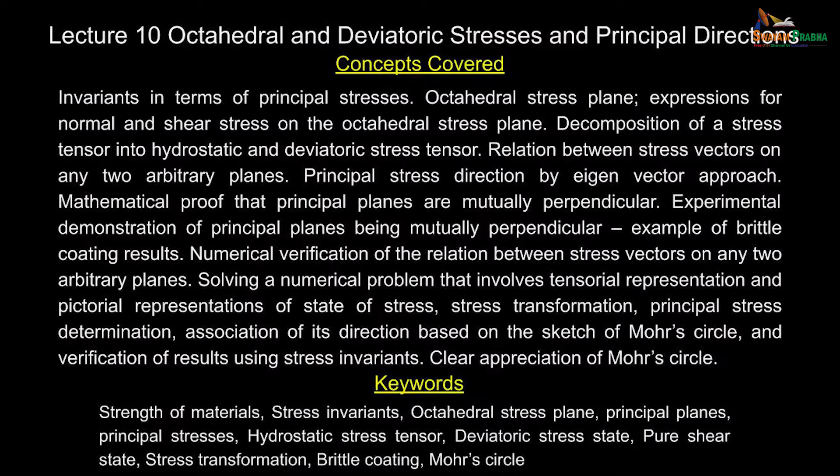We have been discussing principal stresses, and I said if you express the stress tensor at a given point in terms of principal stresses, there are certain advantages - your mathematics becomes a lot simpler. While developing the principal stresses, we have also looked at stress invariants. Stress invariants help us have inbuilt checks in our calculations. Other advantage is it can also be used to investigate whether the given stress tensor corresponds to a simple uniaxial stress or pure shear stress state.

We will also look at other aspects. When I look at the stress tensor in terms of principal stresses, I have put this in different color in order to distinguish them.

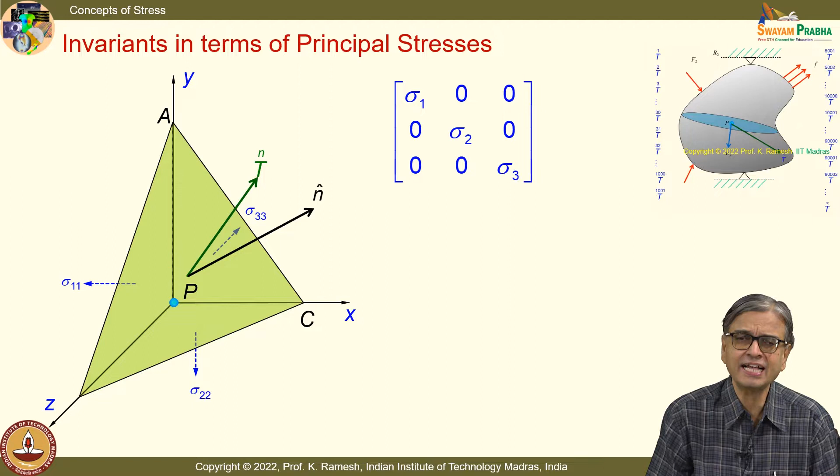You can also see that these are all normal stresses, and the invariants become very simple. Can you write the invariants I1, I2, I3 quickly? You know the definition of the invariants. I1 is straightforward, that is very simple. You should be able to write I2 as well as I3. When I express it in principal stresses, the computation is so simple and straightforward, hardly takes a minute.

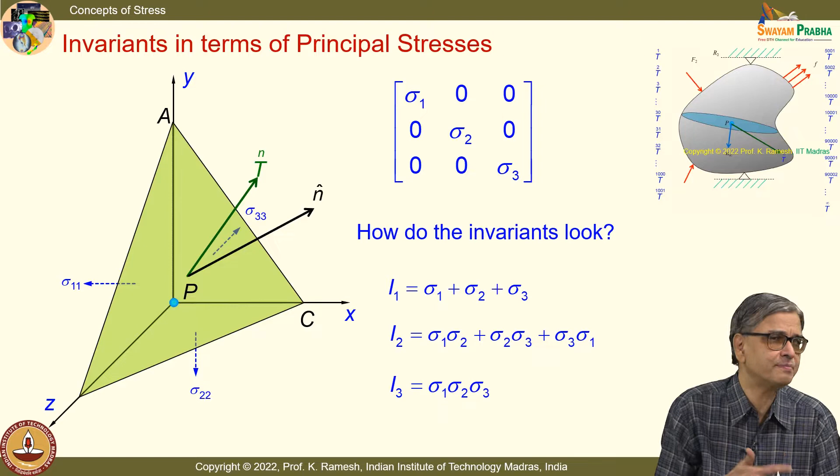So I have I1 as sigma 1 plus sigma 2 plus sigma 3, and I2 simply becomes sigma 1 sigma 2 plus sigma 2 sigma 3 plus sigma 3 sigma 1, and I3 is sigma 1 sigma 2 sigma 3. So simple and elegant. So there is good reason to visualize the stress at a point in terms of the principal stresses.

I also said many of the failure theories are essentially constructed around the principal stresses. So it has an advantage, and you can actually combine loading from various individual loads - from that individual stress tensor assemble and get the final stress tensor, from the final stress tensor get the principal stresses, and adopt one of the failure theories.

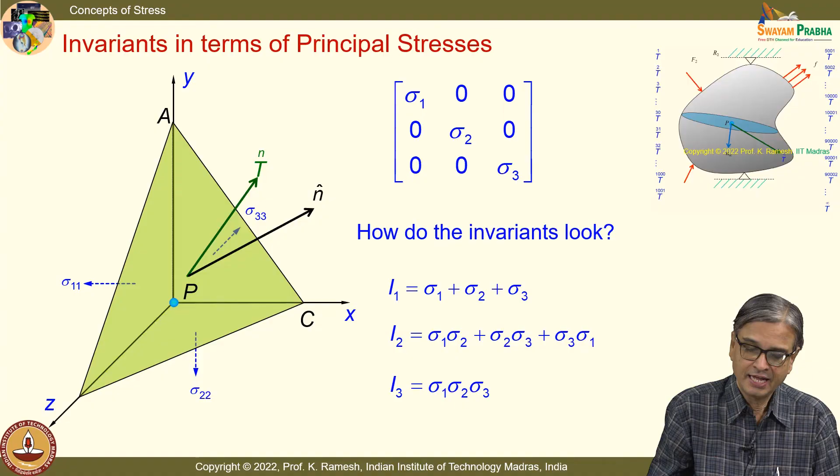People also have looked at newer planes. I said some planes are very important. We have looked at the principal stress plane, we have also looked at the maximum shear stress plane. From principal stresses, people also have looked at, when they were working on plasticity, what are known as octahedral stress planes.

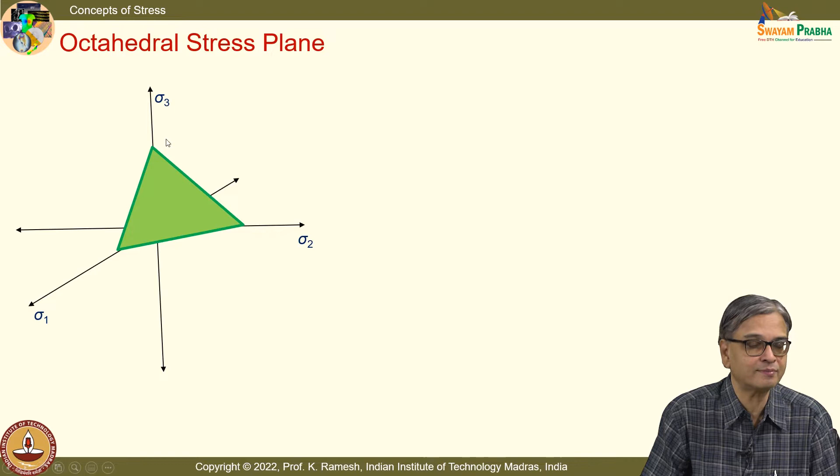What you have is, I have the reference axis as sigma 1, sigma 2, sigma 3, and this plane is equally inclined to the reference axis. We have already said certain planes are very important, and in that list you also include the octahedral stress plane.

Why is it called octa? I have this quadrant, I can have 4 such planes in the top half and 4 such in the bottom half. Then I will have 8 such planes identified.

Whenever you have an arbitrary plane, the stress vector can be resolved into a normal stress component as well as a shear stress component. We have looked at brittle materials failing by normal stress, and ductile materials being sensitive to shear stress. Once they have determined this kind of octahedral stress, they have also looked at what happens to octahedral shear stress.

I said multiple failure theories have been created. So when you understand the state of stress at a point, whichever aspect - if it is a normal stress, look at what happens when the normal stress reaches a critical value. If it is a shear stress, look at what happens when it reaches a critical value. On the similar line, people also have developed theories where what happens when octahedral shear stress reaches a critical value.

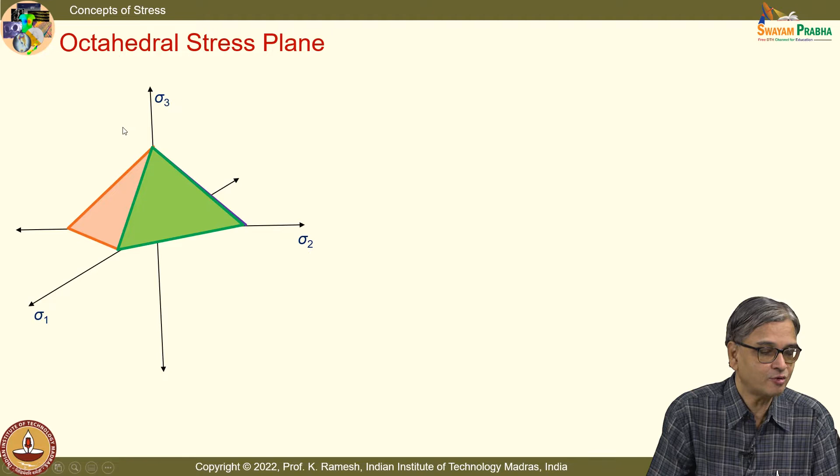So the term octahedral - you can understand, I can have 4 such planes in the top half and 4 such planes in the bottom half, and they are also nicely colored to give you some enthusiasm in learning this course.

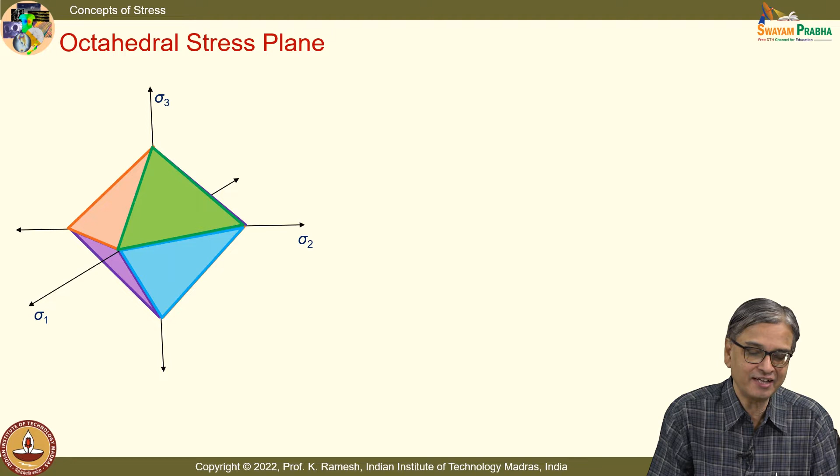Do not think that these planes are colored - these are normal planes, colored for you to keep your attention. The development of this goes to Arpad Nadai. He lived very recently.

The plasticity theory really developed in the early part of the 20th century. People thought, when they were looking at it, that they need to have this octahedral shear stress also. Now you can find out, because you have sigma 1, sigma 2, sigma 3.

In the last class I said, when I have a plane, it is now defined as an equally inclined plane. You can find out mathematically what is the expression for the normal stress and what is the expression for the shear stress. Can you work it out and then check it with me? Because you were supposed to do a homework yesterday, I am not sure whether all of you have done it, because the ground rule is you give the homework, it is never done.

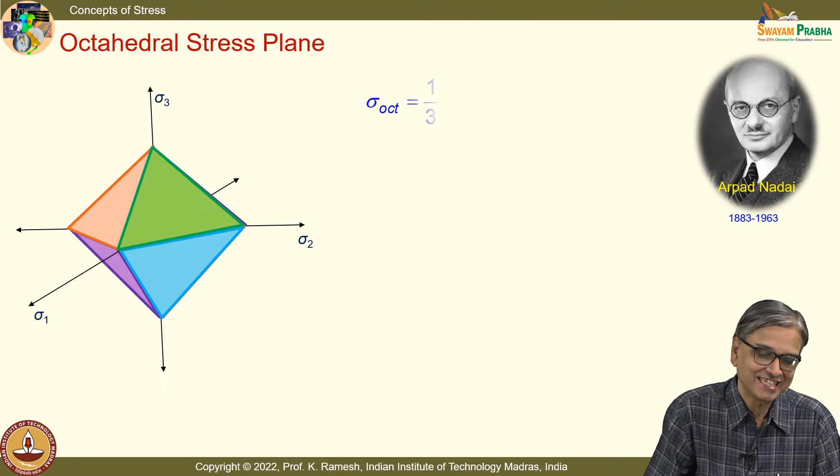So, the octahedral normal stress is very simple to write, that is 1/3 of sigma 1 plus sigma 2 plus sigma 3. In terms of invariants, I get this as 1/3 I1.

You can also write the octahedral shear stress, and you will find that it can also be expressed in terms of the invariants. The tau octahedral is given as 1/3 of sigma 1 minus sigma 2 whole square plus sigma 2 minus sigma 3 whole square plus sigma 3 minus sigma 1 whole square, the entire expression under square root.

And you know the invariants. I have I1 as sigma 1 plus sigma 2 plus sigma 3, I2 as sigma 1 sigma 2, sigma 2 sigma 3 plus sigma 3 sigma 1.

This expression can be rewritten in terms of the invariants. It is not very clear at the outlook, but you can substitute I1 and I2, simplify, and make sure this matches. So I get tau octahedral shear stress as square root of 2 by 3 multiplied by I1 squared minus 3 I2, this expression under square root.

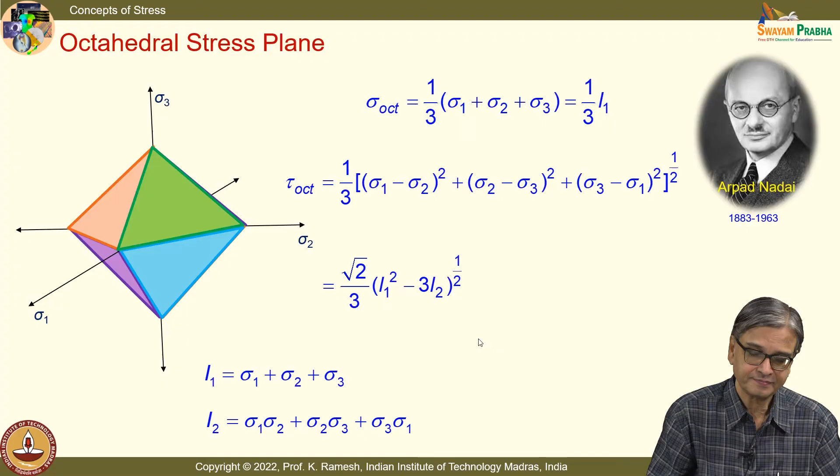People also thought, as I have been saying, we are happily living in linear elasticity. So I can superimpose stress tensor, and any given stress can be uniquely resolved into an isotropic state and a deviatoric stress state. So we will have to look at the stress tensor, the way I decompose it, and figure out what is the meaning of deviatoric.

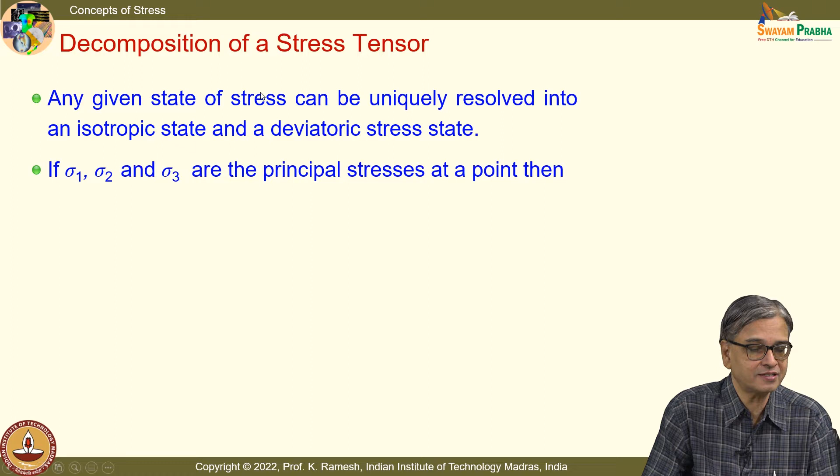So I have the stress tensor expressed in terms of the principal stresses sigma 1, sigma 2, sigma 3. You write the stress tensor in this fashion, with sigma 1, sigma 2, sigma 3 in the diagonal term, and this is written as a superposition of an isotropic state. That means I have a constant value P, identical on all three directions.

That's what happens when you immerse anything inside a fluid bath. Suppose I put it below 100 meters in a liquid, you find it is a hydrostatic compression. Now we have to choose what is P. What is the way you select P? That matters.

And P is taken as 1/3 of sigma 1 plus sigma 2 plus sigma 3.

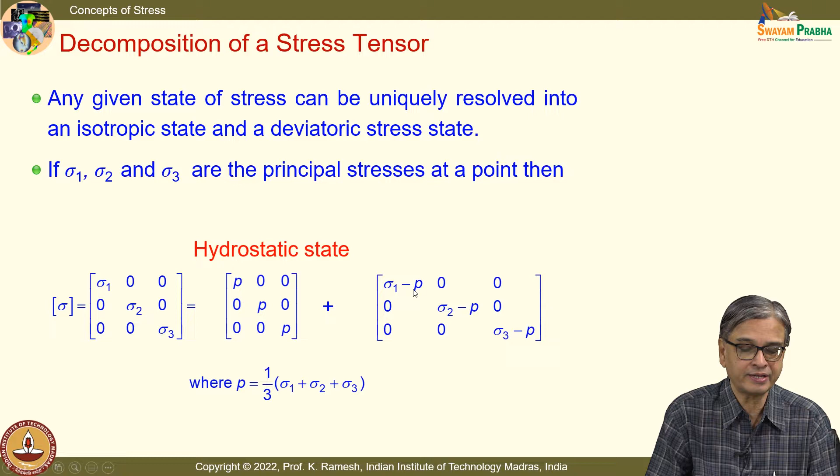So can you fill what should be the stress tensor that adds up to sigma 1, sigma 2, sigma 3? You can easily do that, because I have separated out a part where the stress magnitudes are P, and we understand this is a hydrostatic state. If the addition must equal sigma 1, sigma 2, sigma 3 on the diagonal, the remaining stress tensor is simply sigma 1 minus P, sigma 2 minus P, and sigma 3 minus P.

Can you comment, from whatever you have learned so far, what this represents? Anybody can make an intelligent appreciation of what this stress tensor is? This is definitely called a deviatoric stress state. I have not deliberately given the other name. I want you to find out and tell me, from what we have learned so far.

I can give you a clue: use the invariant, we have looked at invariants, they have some advantage. It is learnt very recently. This stress tensor represents what kind of stress state? That means you are sleeping, you are not exercising your mind. You have learnt it just in the previous class.

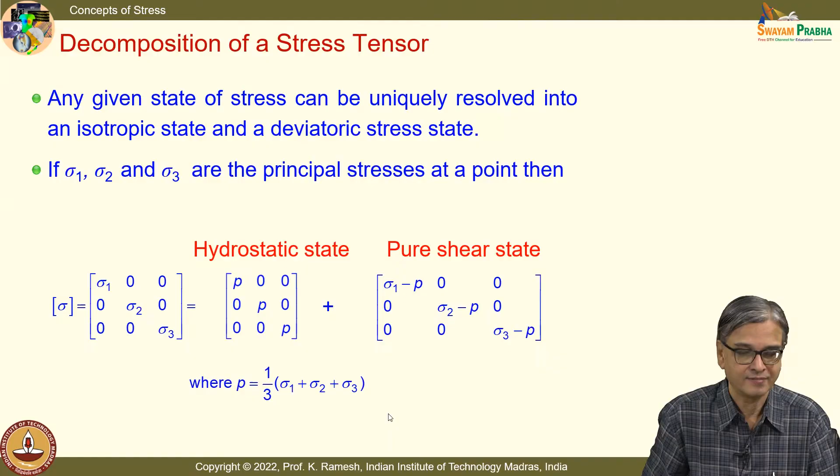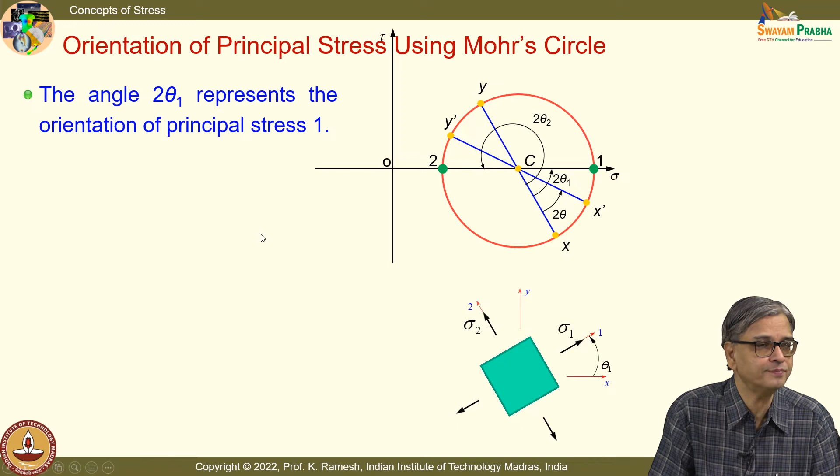And why do you need this? When you have the expression theta equal to half of tan inverse of 2 tau xy by sigma x minus sigma y, you have to recognize that this is a multi-valued function, not a single valued function. So once you get the result, you will have to investigate which of them represents the principal stress 1 direction, which represents the principal stress 2 direction, by making a simple sketch, and you can quickly find out. I would like you to develop that habit.

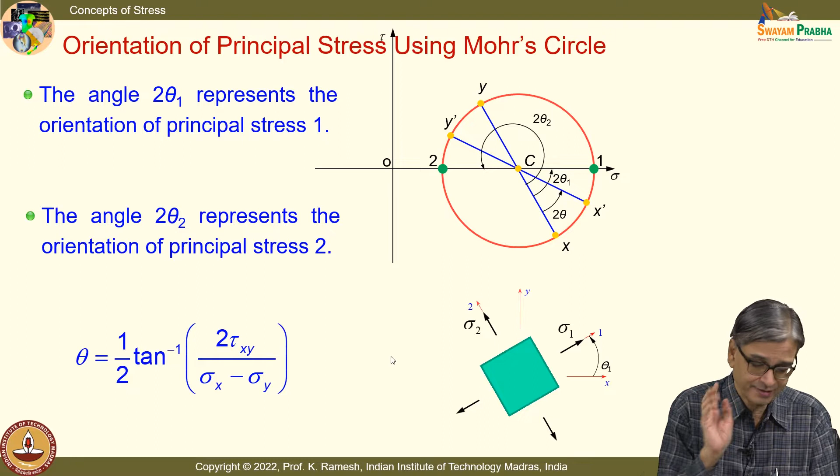When you are having sigma 1, sigma 2, sigma 3, you arrange them algebraically. You cannot do the same for theta 1, theta 2, theta 3. And when sigma 1, sigma 2, sigma 3 are distinct, I will have different directions associated with the principal stresses, and they are mutually perpendicular. We have seen mutually perpendicular from the Mohr circle, fine, but we have still not established it as mutually perpendicular from a mathematical perspective.

I will also try to give an experimental perspective which was done in the early part of the 20th century, so that you can get convinced when I say principal stresses are mutually perpendicular. These are all very celebrated results, and the celebrated results have been verified multiple times in the history of evolution of engineering.

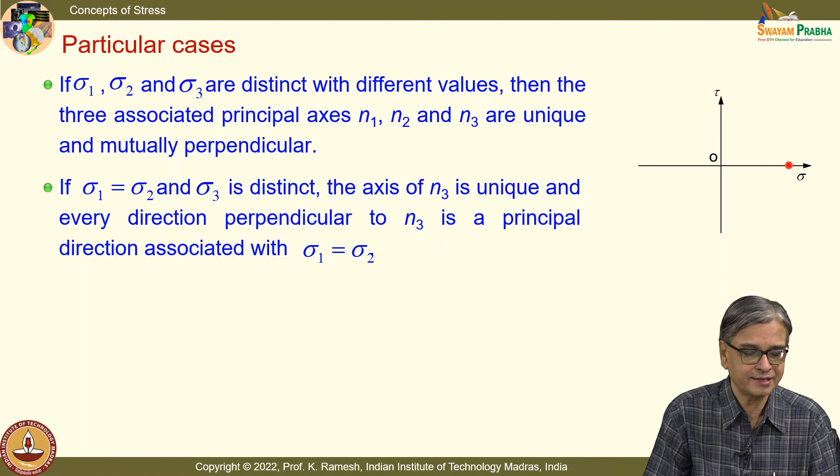Suppose I have sigma 1 equal to sigma 2, and sigma 3 is distinct. What happens to the Mohr circle? It becomes a point. Is the idea clear? When you have that as a point, the expression for the radius goes to 0. When this goes to 0, it implies shear stress is 0, and shear stress 0 is the definition for your principal stress planes. So that is the reason why every direction perpendicular to the sigma 3 direction is a principal stress direction. On this plane, every direction is a principal stress direction.

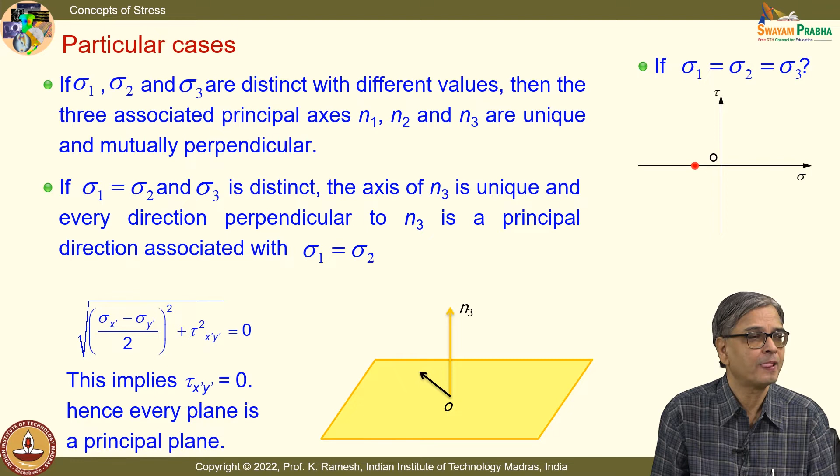So these are all special cases, fine. While developing the principal stresses mathematically, I made a statement that this can also be solved as an eigenvalue, eigenvector approach, but we did not solve it like that. I got the determinant as 0, I pulled out only the 2-dimensional case, and it was a quadratic equation, so it was tempting to solve by a simple quadratic approach, and we got the numbers. We got sigma 1, sigma 2, sigma 3, we never worried about the directions.

Now what we will do is, we will go and see how I can evaluate the orientation from a mathematical approach, because you are living in the computer world.

If you have to depend only on a graphical approach, it will not help in these days. So you should also have a mathematical methodology that helps you to do that, and it is very simple, very straightforward. I just take a two-dimensional case.

In this case I have the eigenvalues as sigma I representing 1 and 2, and the direction cosines associated with this given with a subscript I. If I take a two-dimensional case, I already find out the principal stresses using the quadratic expression. So substitute instead of sigma, sigma 1, and I have this expression.

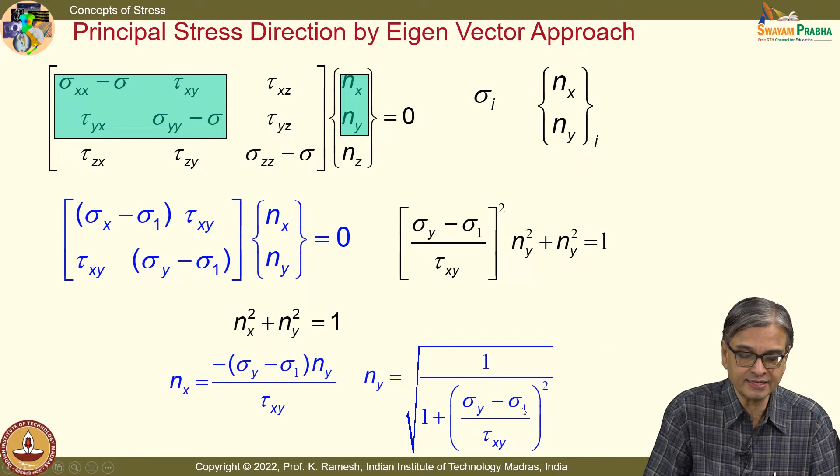So I have this substituted in this, and when I simplify, how do I get? I get ny as square root of 1 by 1 plus sigma y minus sigma 1 divided by tau xy, whole square. See, I have always said when you use mathematics, you should use mathematics very precisely.

When I put square root, what are the roots? Both positive and negative are roots, isn't it? So you should investigate what happens when ny is positive and ny is negative from this, and I get the theta orientation in a simplistic manner as theta equal to tan inverse ny by nx.

So take up a simple stress tensor and then find out the principal stress direction using your conventional approach of Mohr circle, and also use this and substitute for both positive root and negative root, and have a clear understanding how this expression helps you to find out the associated direction. If I have taken sigma 1, this will invariably give you the direction of sigma 1 only. You do not have to go to Mohr circle and then verify. Convince yourself by solving test problems created by you. Is that idea clear? Okay.

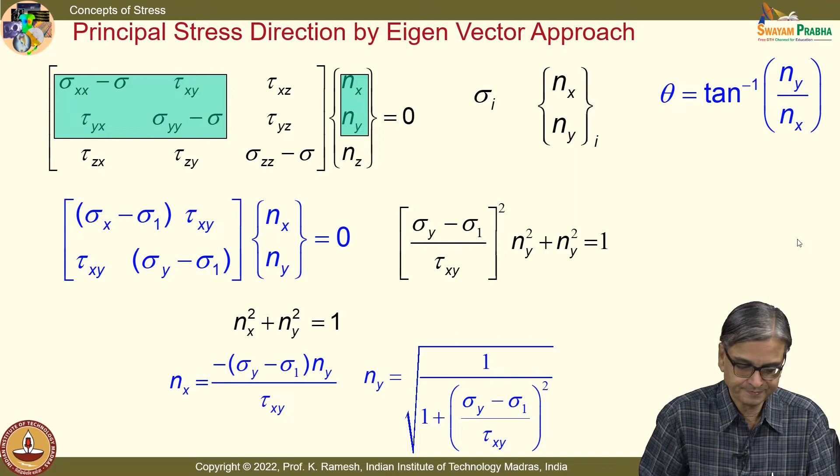This also I asked you to try yesterday as homework. How many of you tried? See, once people develop certain concepts, the mathematicians do not keep quiet.

They try to find out some identities, and what you have is, suppose I take a point, I take an arbitrary plane n, and if I know the stress vector is Tn, and I take another arbitrary plane which is n prime. With our symbolism, we will say the stress vector acting on that is Tn prime, and mind you, these are vectors. We have already understood, we will not put the vectorial notation. It is easy for us to interpret once you understand the nomenclature that we have mentioned in the earlier classes.

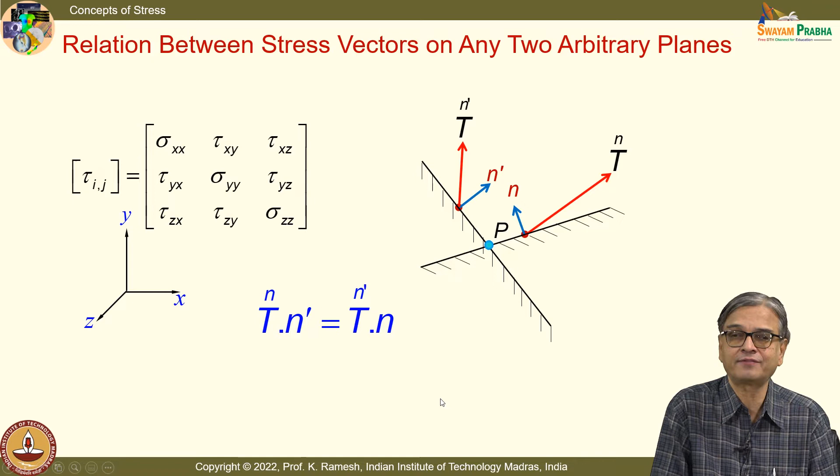You have an identity: Tn dot n prime equal to Tn prime dot n. See, this is a vector, this is a vector, and this is the representation of the dot product. Whatever software we have used to write the equation, it puts the dot product only like this. Earlier I tried to show it with a big dot, later on I gave up. It is because it is becoming difficult to edit every equation. So you understand that this represents the dot product.

This identity we will verify, and we will also use it to show that principal stresses are mutually perpendicular. First we will take this identity. If you have done the longhand mathematical expressions, if you have calculated what is Tn, what is Tn prime, and if you have done the dot product, you would have got both the expressions are identical. Fine, which you should have done as homework. Nevertheless, we will verify it in a different manner.

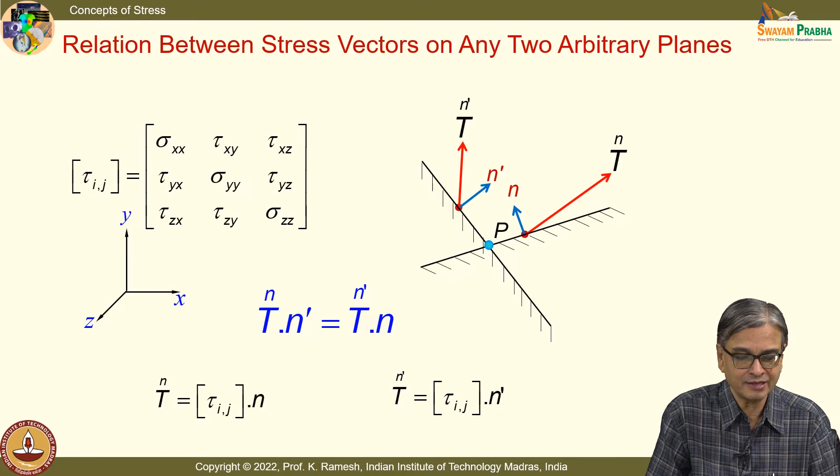But before that, I would like to show mathematically that principal stress directions are mutually perpendicular. So I take this identity and I say that I have principal stresses are sigma 1 and sigma 2, and from your Cauchy's formula I can find out what is stress vector Tn and Tn prime. So if I look at the identity, they have to be equal like this.

So if I substitute for Tn and Tn prime, I get this: sigma 1 dot n dot n prime equal to sigma 2 dot n prime dot n. In a generic problem, sigma 1 and sigma 2 are not equal. But if you have to maintain the identity of this, what should go to zero?

You get the point, the dot product of n and n prime should go to zero. That is what this equation says. When I have this identity to exist, if the dot product is zero, the identity is validated. When does the dot product go to zero? When the directions are mutually perpendicular.

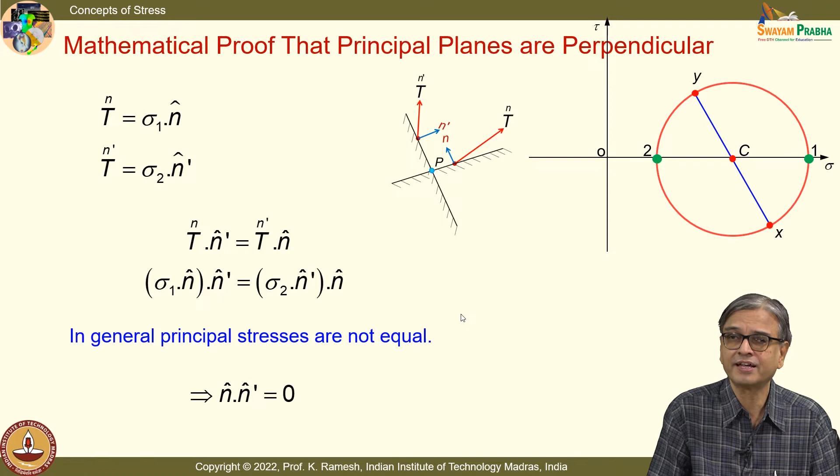Now we go and take a simple stress tensor and verify mathematically whether this identity is existing. So before that, I think I have experimental verification of this. You are all now familiar with failure of a chalk.

How does a chalk fail? When the normal stress reaches a maximum, it fails. We have also classified that kind of failure as associated with a material which is brittle. And what is done here, very beautifully, is a cantilever beam on which you spray a paint which is a brittle material. When I apply the load, what you find is you have cracks getting developed.

Can you associate the crack to a physical reality? That means the normal stress at that point has reached a maximum. That is why the crack has formed. So, perpendicular to the crack is the principal stress direction.

People have taken, it is a very complicated experiment because this is done in compression. So I have to spray the paint when the object is compressed, then slowly release it. I will get the first set of cracks, and then apply the load again and slowly release it, I will get the second set of cracks.

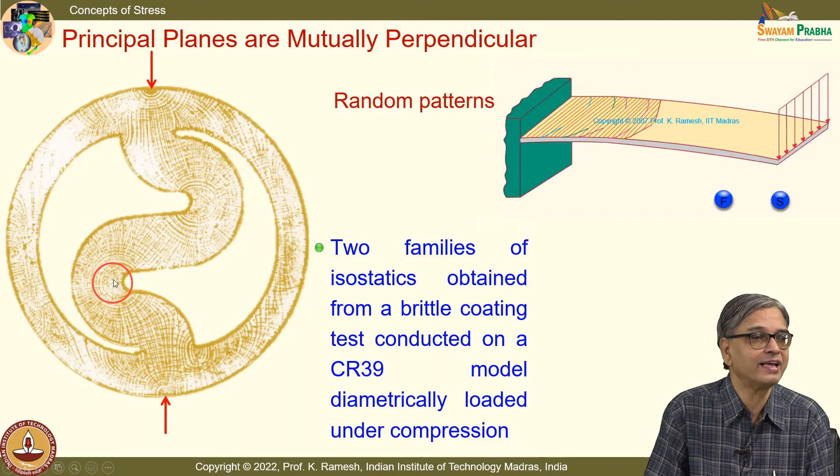But before that, I would also like you to see one region here. If you look, the cracks are random here. We have also seen that when sigma 1 equals sigma 2, every direction is a principal stress direction. So that means a crack can appear in any direction depending on the local weakness of the material.

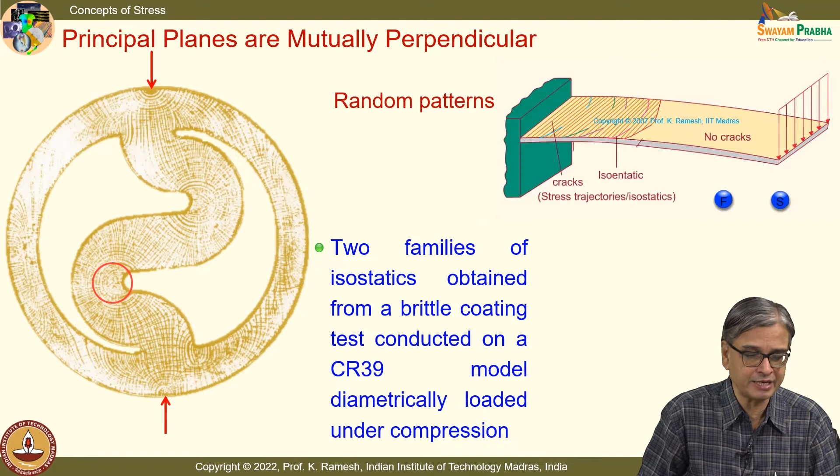You are actually discussing the state of stress at a point of interest. When you go to whole field experimental techniques, you get a picture of what happens on the field. You need that kind of information also.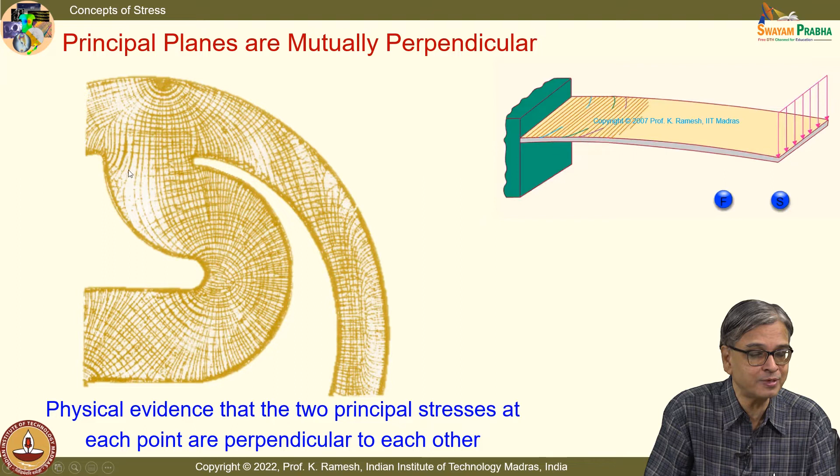Imagine, stress tensors were developed in 1822, and the verification of whether principal stresses are mutually perpendicular experimentally happened in the 1930s. Until then they didn't have this kind of experimental approach. This convincingly proves that principal stresses are mutually perpendicular. So in science, when people make statements, they verify it from various perspectives.

So when you do your mathematical calculations also, I want you to use these stress invariants effectively to verify your results. You can verify it yourself. It is not that only when your answer book is corrected by me, I verify whether your answer is right. You can verify yourself whether you have got the correct answer when you do stress transformation, when you do principal stresses.

So certain aspects of a calculation you can verify. If there is a possibility to verify, utilize that. Don't be in a hurry, just follow it, get some number, and write it down. I expect you to verify.

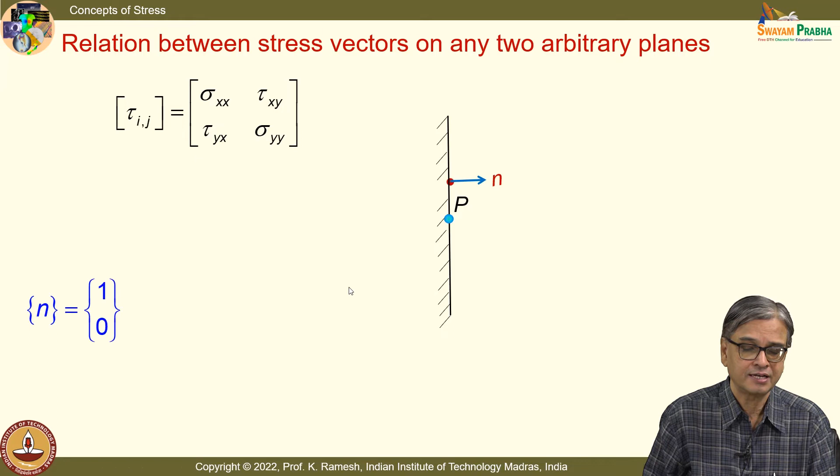So now what we will do is a class of problems which will verify whatever identities we have developed, and also how to get the principal stresses, stress transformation, etc. Now I want to take two planes. I have the plane like this, 1, 0, and I have the stress tensor, and I want to take another plane which is at 45 degrees. It is easy for me to write the direction cosines.

So n prime is nothing but 1 by root 2, 1 by root 2. Can you go and verify the identity Tn dot n prime equal to Tn prime dot n? I have given you the stress tensor. Please take out your calculator, use Cauchy's formula to find the stress vector, find out the individual stress vectors and take the dot product. Then verify with my slide.

That's a simpler way of verification of these identities. One longhand way is to put the expression and make sure that the expressions are correct, which you ought to have done. If you have not done it, go back and do it at least today.

So, I have to verify this identity. It's very simple to do, a very simple calculation. The idea of doing the calculation is that you should retain in your memory that such identities exist. If you solve a problem, you remember them better.

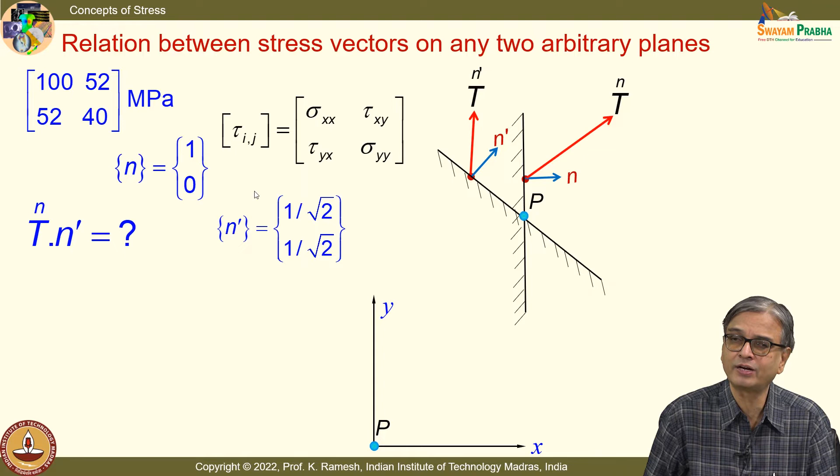Very simple to do. I have n prime as 1 by root 2, 1 by root 2. I have all the quantities I need. When I do this, I get 100i plus 52j multiplied by 1 by root 2 i plus 1 by root 2 j. That gives me 152 by root 2.

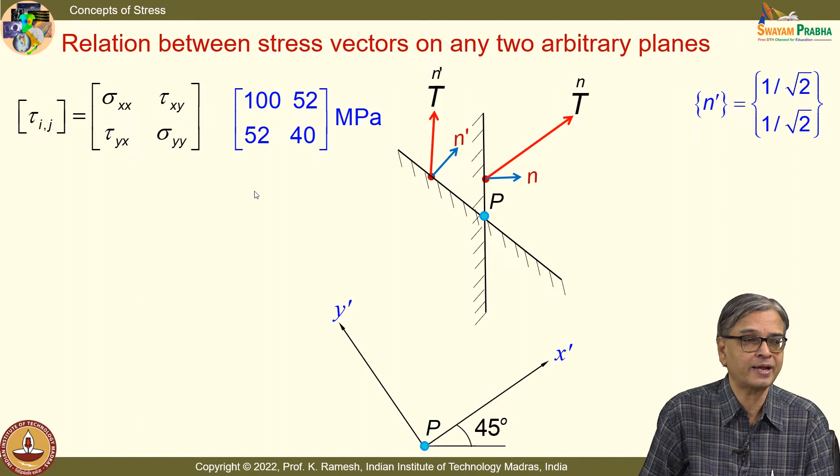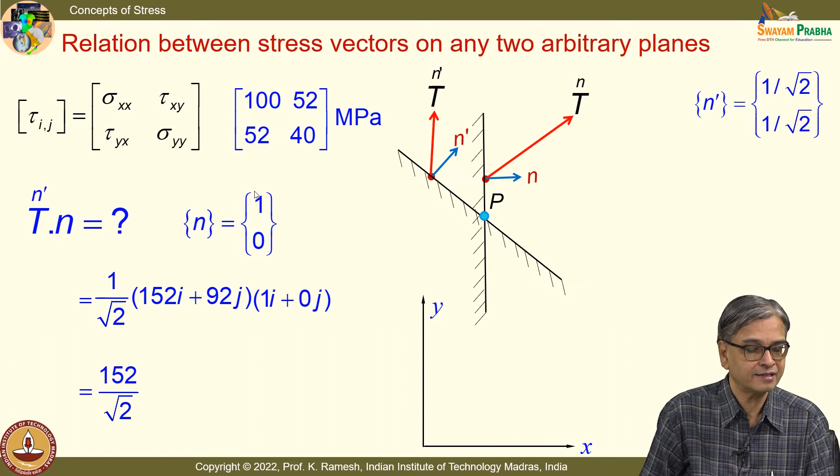Can you do Tn prime dot n? When you do that, you will find this is also identical. Very simple calculation, not complicated at all. But if you do that, you will remember the identity Tn dot n prime equals Tn prime dot n. I have the direction cosines, I have to get Tn prime and I have n, all the quantities are there. When I do this, I get again 152 by root 2. So this shows that you have the identity.

We have already utilized the identity to prove that principal stress directions have to be perpendicular mathematically. And we have also seen, by a beautiful experimentation called brittle coating, you have two families. You have also seen the whole field representation, not just at a point. That is very difficult to do, which is why it took so much time, and it was done by Durelli, who was a proponent of that technique.

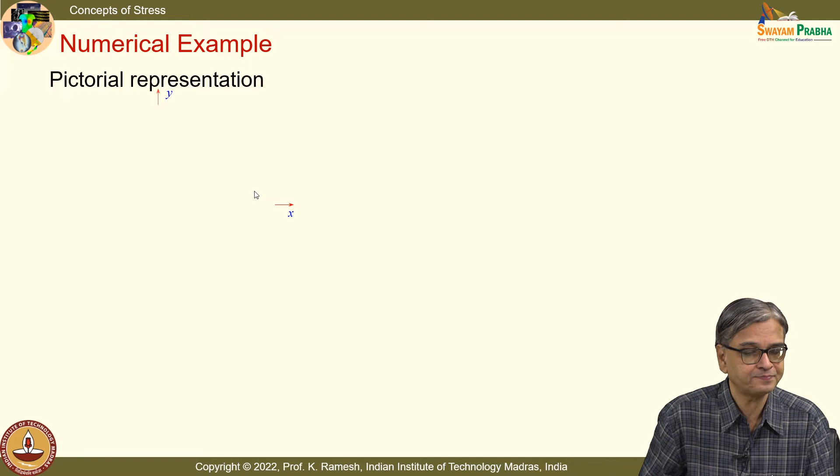Now we will go for stress transformation, principal stress direction, and so on. I have a pictorial representation. We have already seen the pictorial representation. Can you write the tensorial representation? If the pictorial representation is given in this manner, can you write the tensorial representation, and once you write it, can you give the graphical representation? You should be able to do it quickly since we have spent sufficient time developing the fundamentals.

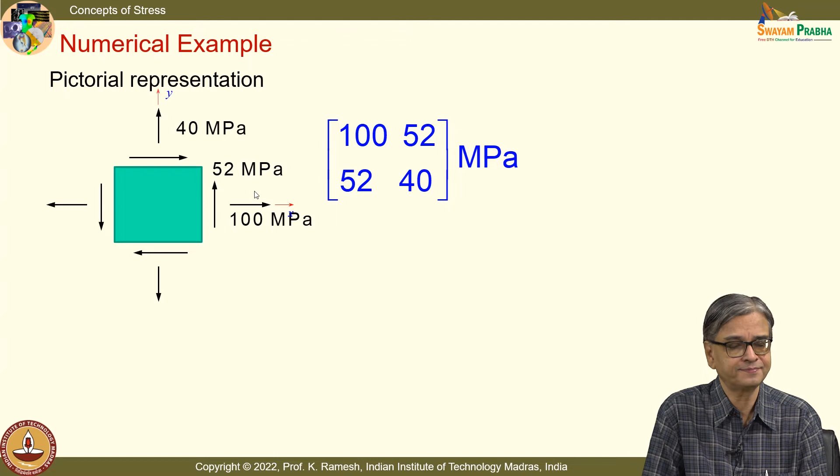Stress tensor can be given pictorially, written in tensorial fashion, and also given graphically. I can also give you a Mohr's circle and ask you to do calculations. So the tensorial representation is the same one: 100, 52, 52, 40. Can you draw the Mohr's circle?

Mohr's circle is very straightforward, and you have to mark the x and y plane correctly. If you draw it with the convention that you rotate in the clockwise direction in the Mohr's circle, you can also rotate in a similar direction in the physical plane to locate the plane of interest, whether clockwise or anti-clockwise, whichever way.

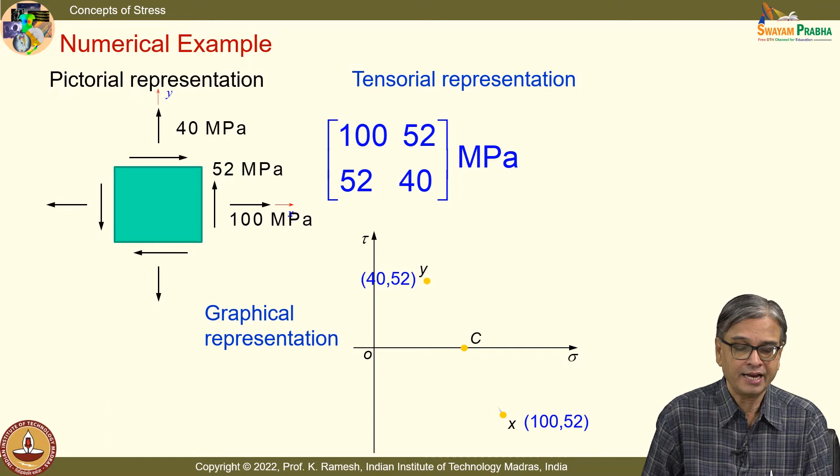So I have the graphical representation like this. I have the sigma and tau axis. So will the X plane come in the first quadrant or which quadrant? Fourth quadrant, okay. So I have the X plane, I have the Y plane, join them and I get the center, and draw the circle. So I have everything - any plane of interest, I can go to the Mohr's circle and get it, but we would also like to do it mathematically.

You also know that you have principal stress 1 and principal stress 2, and from this diagram you can say the acute angle gives sigma 1 direction and the obtuse angle gives sigma 2 direction. If I do the calculation, and my multivalued function gives me acute and obtuse angles, I should correctly filter out which is theta 1 and which is theta 2.

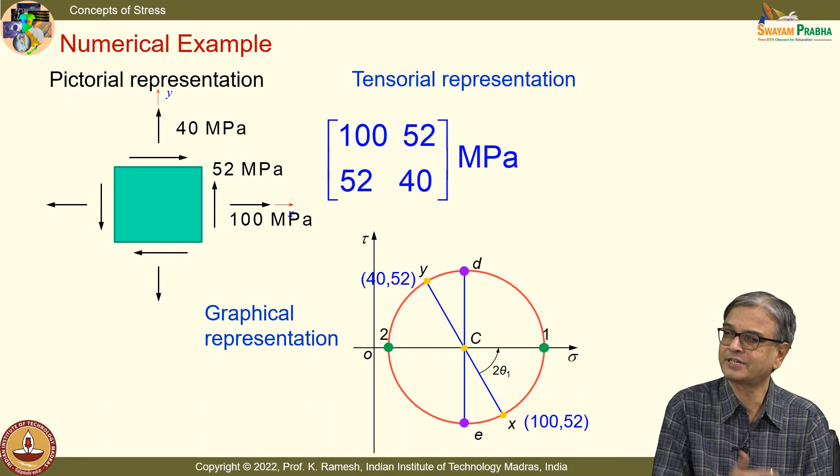And you have the maximum shear stress representation. So what we will do is go and find out the principal stresses mathematically. You have the expression - can you get me the principal stresses?

You have the mathematical expression, you have the identities. Now what I would request is, when you get the principal stresses, also verify from the invariants. Develop that habit right now, so you should get I1 and I2 wherever relevant. In many cases even I1 should be sufficient, but while we develop the practice, it is better that you calculate both I1 and I2, so it becomes familiar when you need expressions that require I2.

So what is the value of I1? It's louder - 140. What is the value of I2? Calculate it.

I get I2 as 1296. So the habit is to get the invariants calculated, find out the principal stresses. Anybody has found out the principal stresses by using the quadratic expression?

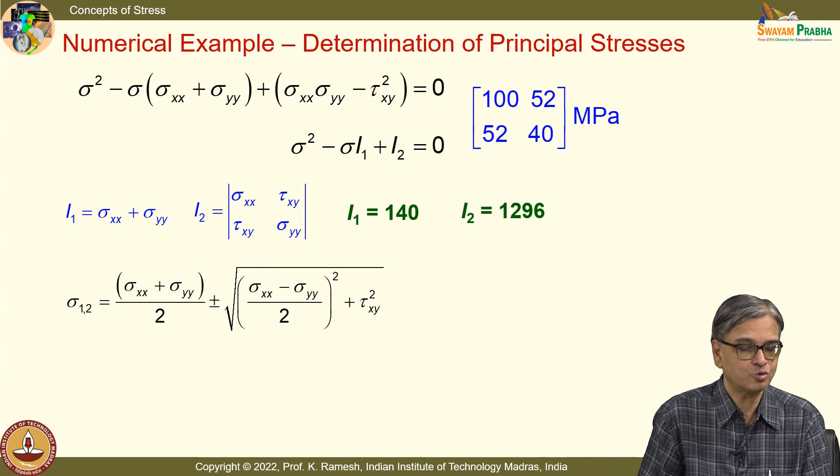You have this basic expression and you get sigma 1 as 130.03 and sigma 2 as 9.97. I have to give the decimal places, because when they add up, does it add up to 140? It adds up to 140. So that is an inbuilt check, fine.

And you have the expression for theta, and when I get this, first write it like this. Theta can have 30, 120 and all that. Do not jump and write whatever the first value you have as theta 1, second value as theta 2. Don't do that.

We have to qualify, and for this you can take the advantage of Mohr's circle. You have the acute angle, so I can label the acute angle as theta 1 and the obtuse angle as theta 2. I am telling you a recommended procedure: verify the invariant, and also use the Mohr's circle to label the theta 1 and theta 2 directions. It is very fast, and you also use the Mohr's circle in a very effective manner.

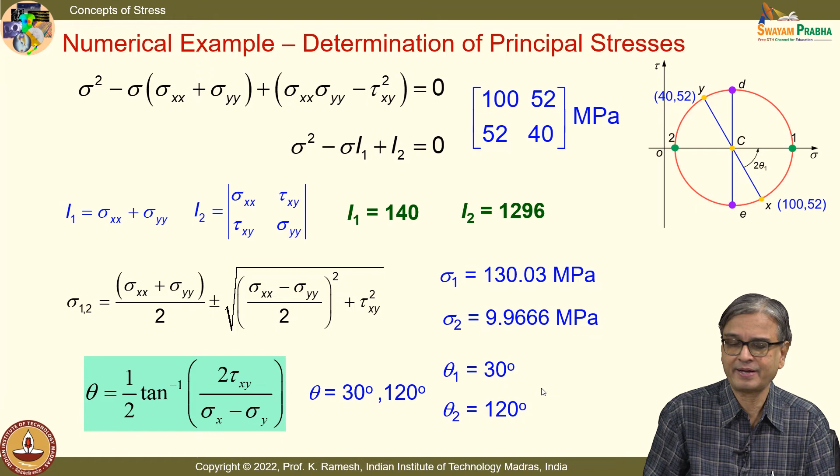Suppose I ask a question, I can also represent the same stress tensor in terms of principal stresses. The same stress tensor, state of stress at the same point, can be expressed in a different manner. I want you to recognize that. In this representation, I have zeros, that makes my mathematical development very simple.

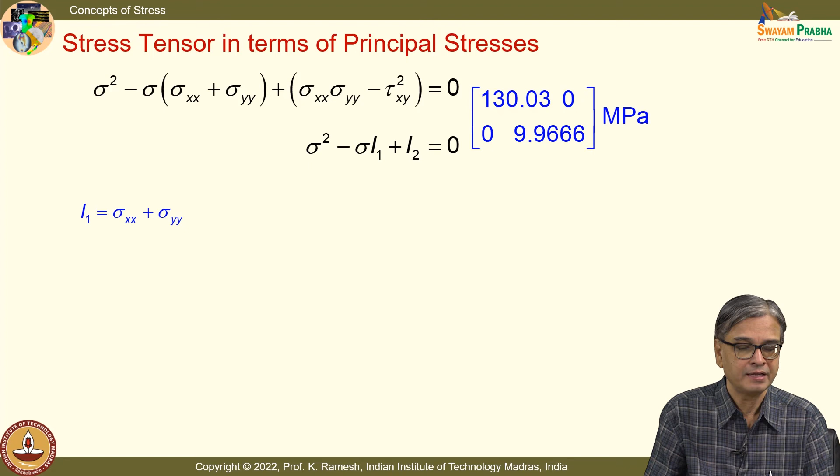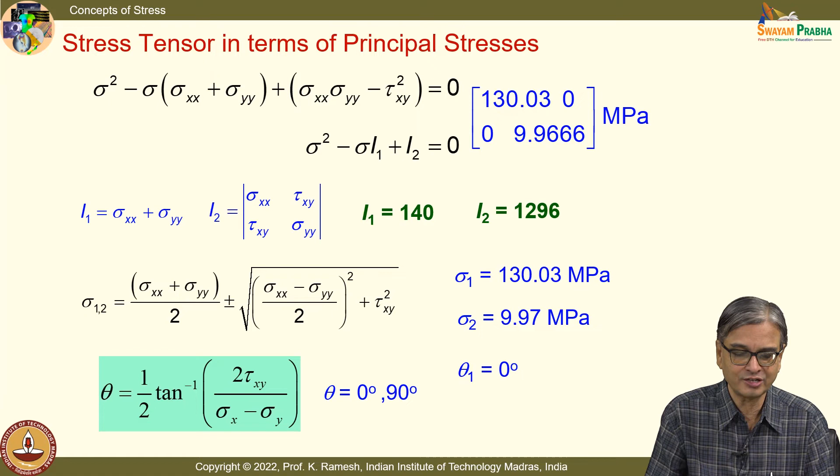This is trivial, let me not spend time on this, because I can get I1, I2, I can also say that this is the principal stresses again, and then say theta 1 and theta 2 are 0 and 90, that is straightforward representation. But what we will do is find out the stress tensor for an arbitrary plane. For us to make life simple, let me take a plane at 45 degrees. Theta equal to 45 degrees.

I have told you how to write the expression based on the indicial notation. Can you write the expression for sigma x prime, tau x prime y prime, sigma y prime y prime? Can you write it down? It's a practice. See, you have to pick up speed in some sense.

But verification, inbuilt verification, wherever it is possible, you should be able to do that. You should not shirk from that. That's the idea behind it.

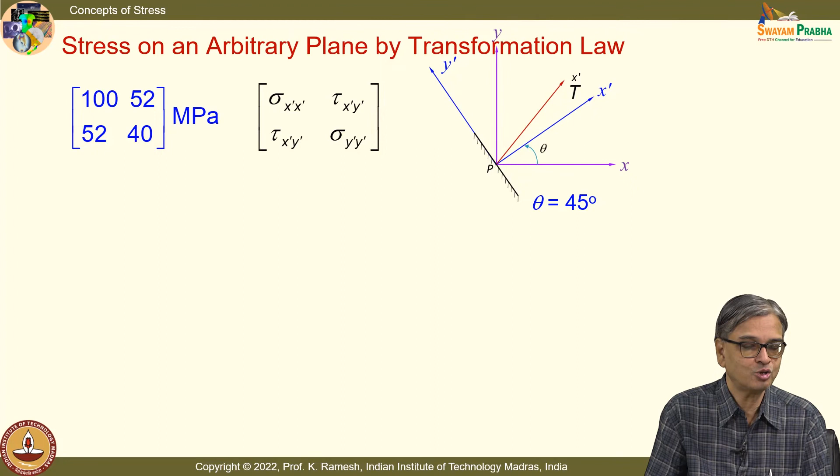So you have the expression sigma x prime, we have seen it several times in the class, tau x prime y prime, and you also have sigma y prime, and when I substitute the quantities, the stress magnitudes as well as theta equal to 45, this comes out to be 122 MPa, and tau x prime y prime is minus 30 MPa, and sigma y prime is 18.

Can you verify whether our computation is correct? Check the I1. What is the value of I1? Again 140. So that means we have done the stress transformation correctly. So that aspect I want you to absorb.

Can I find out what the principal stresses are based on this representation of the stress tensor at the same point? Ideally, what should I get? I should get the same result as what we have got earlier from a different stress tensor. Do the computation. I am going to show that you can easily verify it.

You should be in a position to do that, and also verify whether your I1, I2 are identical, and how do you label the principal stress direction. Principal stress direction will be different now. Principal stress magnitudes will be the same, but I am looking at it from a different plane, so principal stress directions will be different. So with that idea, if you look at it and utilize your Mohr's circle effectively, you will find it useful.

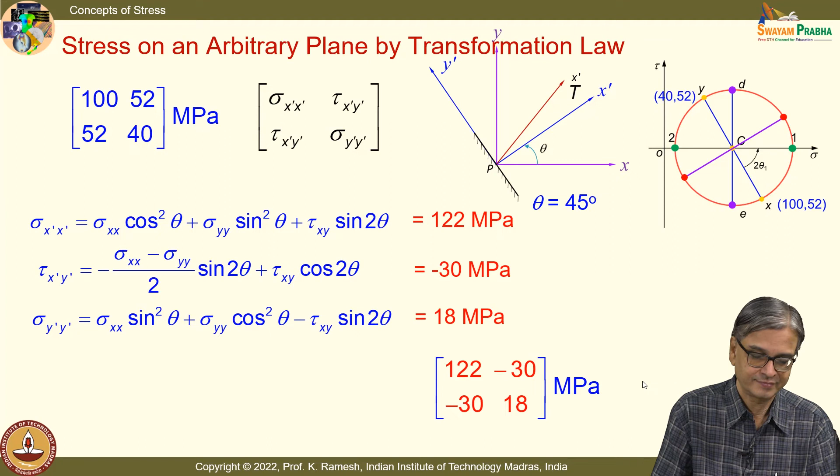Anybody has results? Because on the next slide I am going to show my results. I am not going to spend time on it. At least you calculate the principal stress direction, because principal stress magnitudes will be identical. You can easily calculate 2 tau xy divided by sigma x minus sigma y. Calculate theta. Can you calculate theta? By the time, I will have the other computations shown on the screen.

So this is just to make you recognize the steps. I have the I1 and I2, and then when I use the quadratic expression, I do get the same magnitude of sigma 1 and sigma 2. Tell me the principal stress direction. What are the values that you have got now? Anybody? At least I should have one student completing the computation.

Is the idea clear? You have the expression for theta, 2 tau xy divided by sigma x minus sigma y. My suggestion is write all the values from that as theta and compare it with the Mohr circle, label that as theta 1 and theta 2. Anybody got the values now?

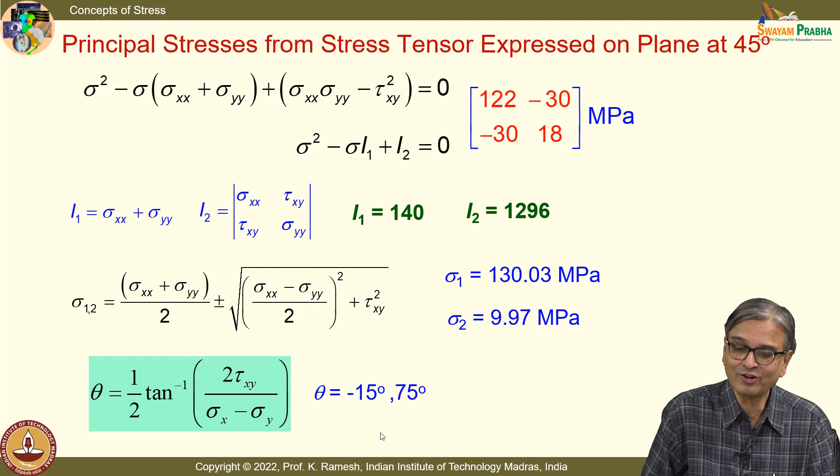I think it is taking a little more time than what I anticipated. Okay, I will give you the values. How many of you have got minus 15 and 75? Okay, then why did you not tell me? Okay, so I look at the Mohr circle. From the Mohr circle, I can say theta 1 is minus 15. Why is it minus? It is clockwise.

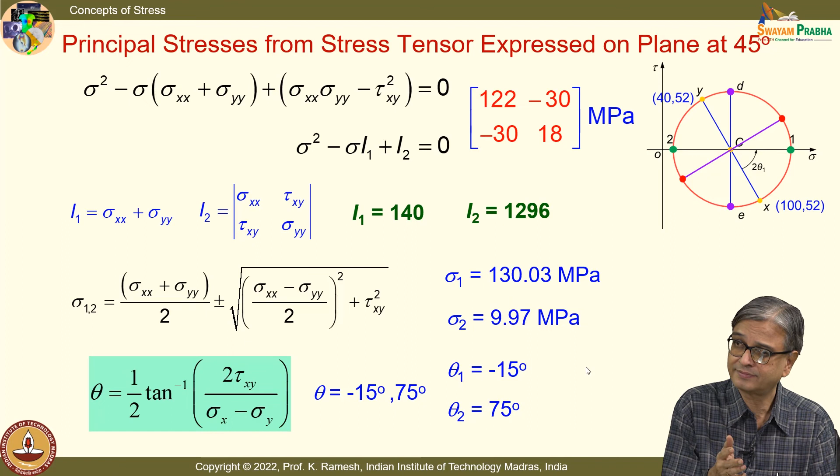I have this as the reference plane. From this plane, I have obtained the theta direction. Is the idea clear? Do you know how to do the computation? So you have seen for yourself whether I take the stress tensor with respect to the x, y plane or this plane, I get the same sigma 1 and sigma 2. Ought to be, but you have seen it black and white here. And this is a summary, because this gives you the way that you should look at the stress tensor.

State of stress at a point can have multiple avatars, all are identical, but they look different. See, Hindu gods are different, but the concept of God is one. You have that expression here. The stress tensor looks different from different planes, but they all represent the state of stress at a point. The principal stresses are identical. So I have this 100, 52, 52, 40.

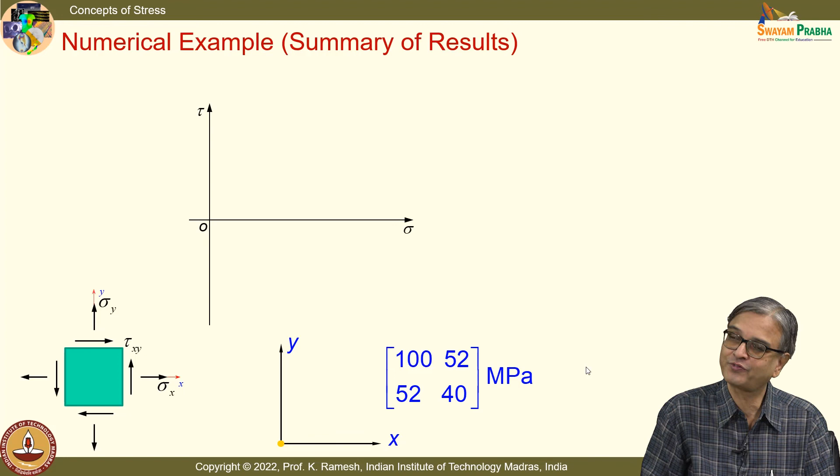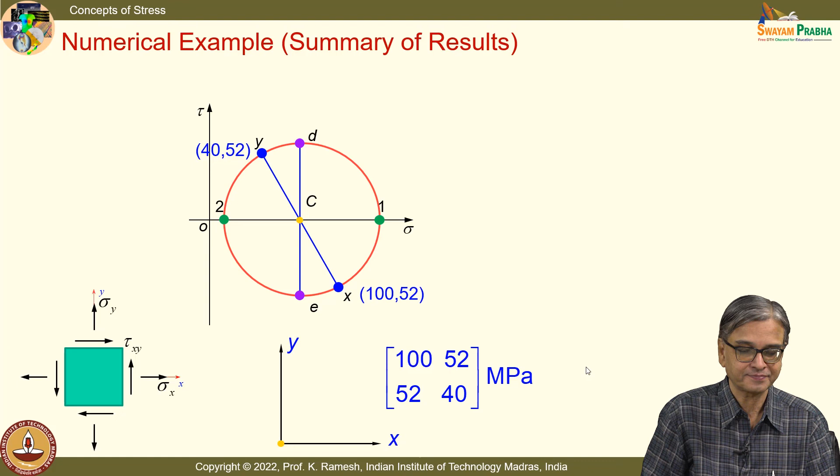Let me mark that as a big blue dot on the Mohr circle. I have the Mohr circle drawn. Then the second representation is, it can be represented with respect to the principal stresses. The stress tensor appears different. The principal planes are beautifully shown here. So I have the principal stress directions 1 and 2 shown. I have referred with respect to the xy axis: 100, 52, 52, 40. With respect to 1, 2, I have this as 130.03, 9.9666. The stress tensor representation appears different, but we have seen that it represents the same state of stress for the point of interest.

Then we have also looked at the plane at 45 degrees. And what are the magnitudes that we have got? We have got that as 122, minus 30, minus 30, 18. See, here everything is positive. Some quantities are negative here and some quantities are 0 here. It is again the state of stress at the same point, it can appear differently. But from a Mohr circle, it is very easy to see. But from numbers, it is difficult to comprehend.

So this also, you have the axis oriented here. I would appreciate that you draw this sketch. Okay, I have this represented in this fashion. Stress tensor is represented with respect to the x prime, y prime. I can also represent the stress tensor based on the maximum shear stress plane. I can also do that. I have all the numbers from the Mohr circle. From the Mohr circle, I can pick this out, and this is the stress tensor with respect to the maximum shear stress plane.

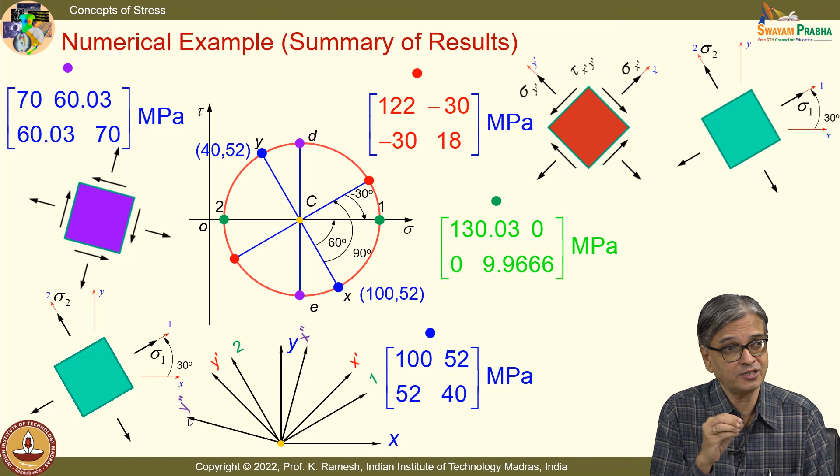So what we have done is, we have represented the stress tensor from x, y, to x prime, y prime, as well as x double prime, y double prime. All are giving the same values of principal stresses, and using the Mohr circle and the expression for theta, you can correctly fix the principal stress direction 1. Whether it is theta 1 or theta 2, you have to filter it out from your result. Not that the first result is theta 1 and the second result is theta 2.

So in this class, we have looked at the way the principal stresses have encouraged researchers to come out with new ideas. One new idea which we saw was identification of the octahedral stress plane. The other idea was splitting the stress tensor into a composition of a hydrostatic state plus a pure shear stress state. Instead of deviatoric stress state, we will call this a pure shear state, because we know what happens in pure shear, which you are able to identify by utilizing the invariants. Then we have also proved mathematically that principal stress directions have to be mutually perpendicular, and also saw a beautiful experimentation by brittle coating that gave two families of curves on the entire body, showing that every point on the object has principal stress directions at that point mutually perpendicular.

That is seen at every point in the whole field. Then we have also learned how to do the computation systematically, as well as to do the inbuilt checks. I expect you to do the inbuilt checks and then report the results. Thank you.